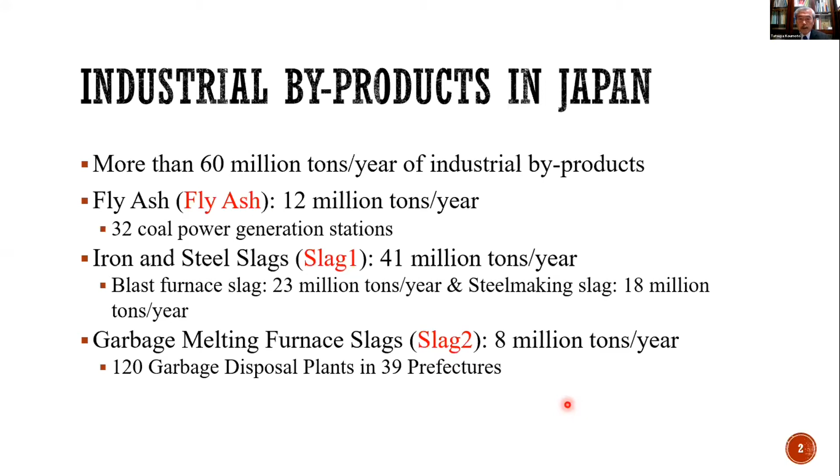And garbage melting furnace slags, that is slag 2, of 8 million tons per year from 120 garbage disposal plants in 39 prefectures. Almost all of these fly ash and slags are effectively used together with cement in the field of civil work according to the chemical and mechanical characteristics. The utilization of these fly ash and slags has led to the reduction of cement and therefore CO2, a contributor to global warming.

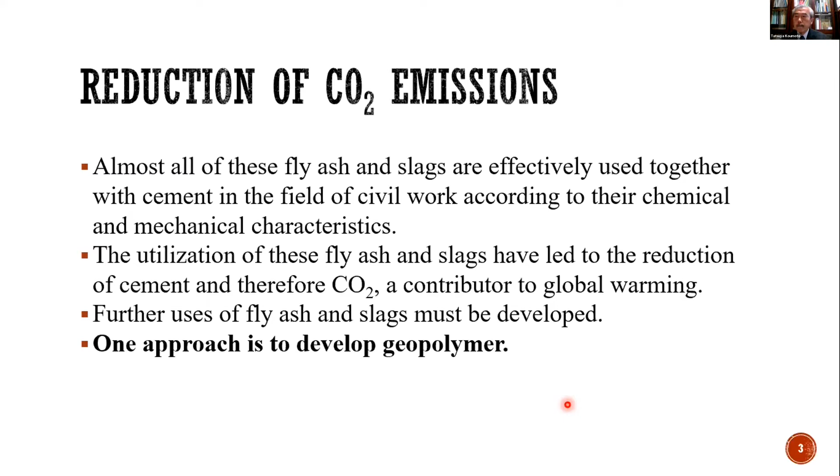Further uses of fly ash and slags must be developed. One approach is to develop geopolymer. This lecture introduces a method for production of high compressive strength geopolymers, strength diagnosis of geopolymers, and the chemical and mechanical characteristics of geopolymer by mixing fly ash and slags as binders with NaOH and sodium silicate as activators.

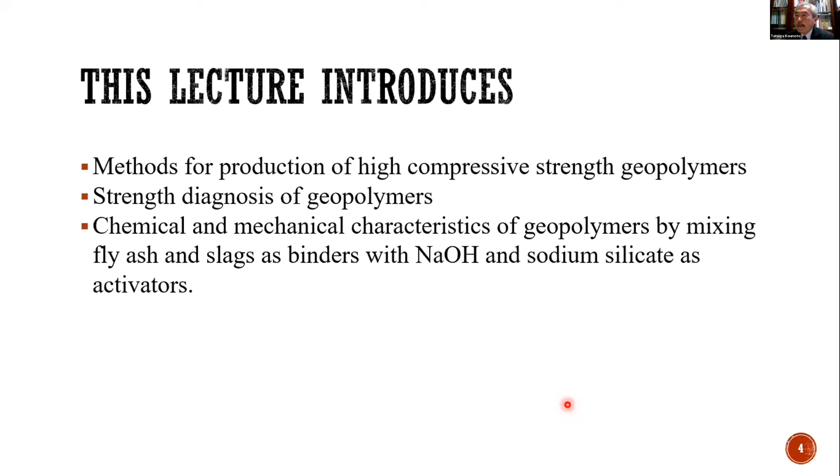Table 1 shows chemical compositions of tested geopolymer materials. I prepared in total 24 geopolymer samples, and they are classified into 9 categories of geopolymer materials. As chemical compositions, these 6 compositions are shown, and I treated these 3 compositions, SiO2, Al2O3, CaO, as the main chemical composition of geopolymer.

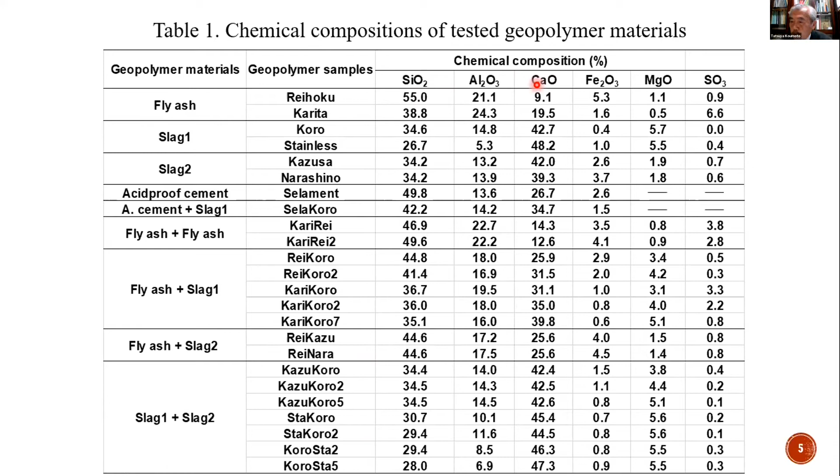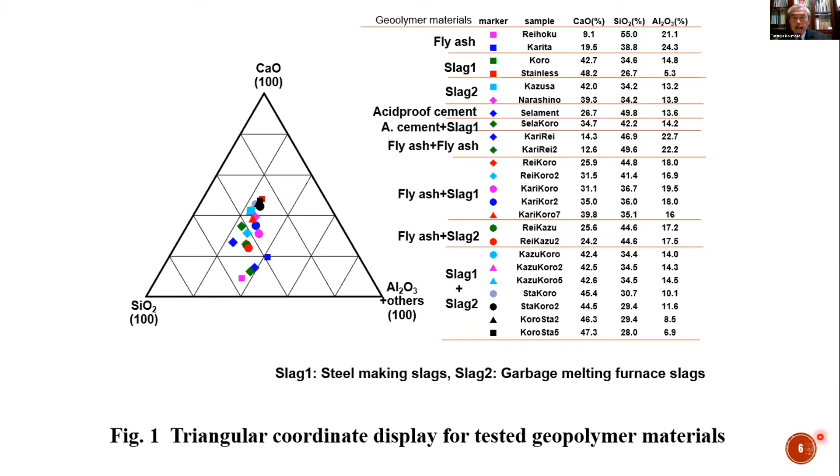Figure 1 shows a triangular coordinate display for tested geopolymer materials. The triangle is drawn for CaO, SiO2, and Al2O3 plus others. This display method helps us to understand the chemical composition of binders visually. For production of geopolymers, as preparation of binders, the particle size D50 was smaller than or equal to 0.106 millimeter. Refer to Koumoto's ASCE paper shown here.

For making geopolymer samples, the compressive strength Qu is considered as a function of W, which is the ratio of solution, NaOH plus sodium silicate, to solid binders by weight, and eta, which is the ratio of NaOH to sodium silicate by weight. Referring to Koumoto's paper, w equal to 0.4 is used. And here, eta was used in the range of 0 to 1.0. Remolded geopolymer samples were cured at room temperature for 28 days, then used for compression test.

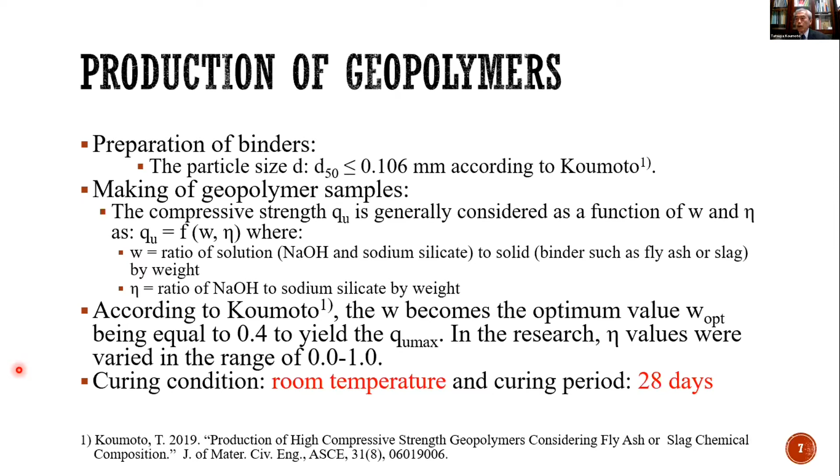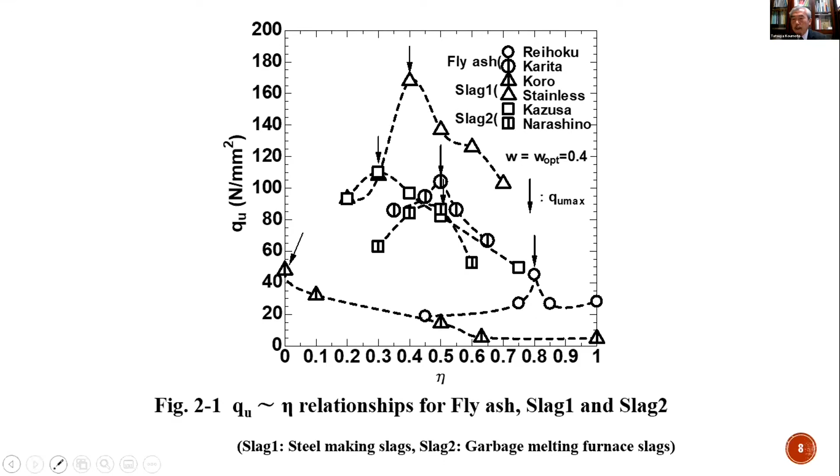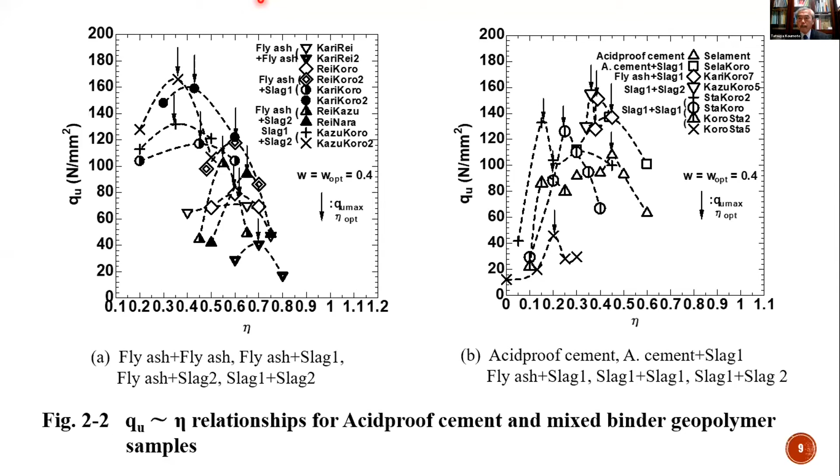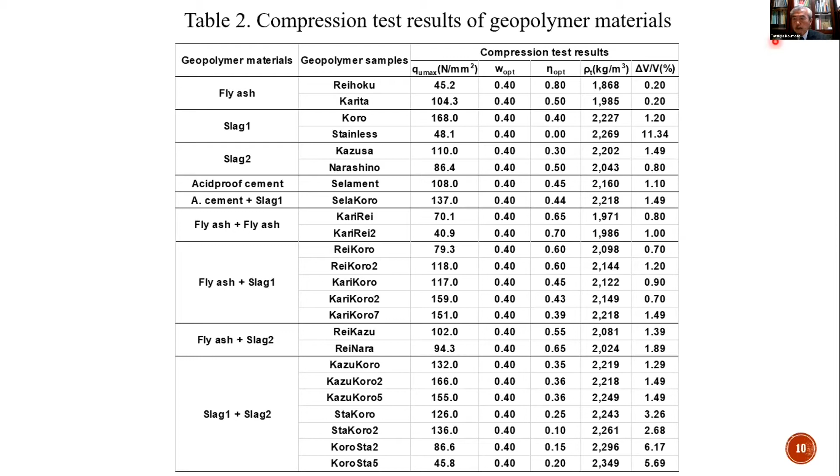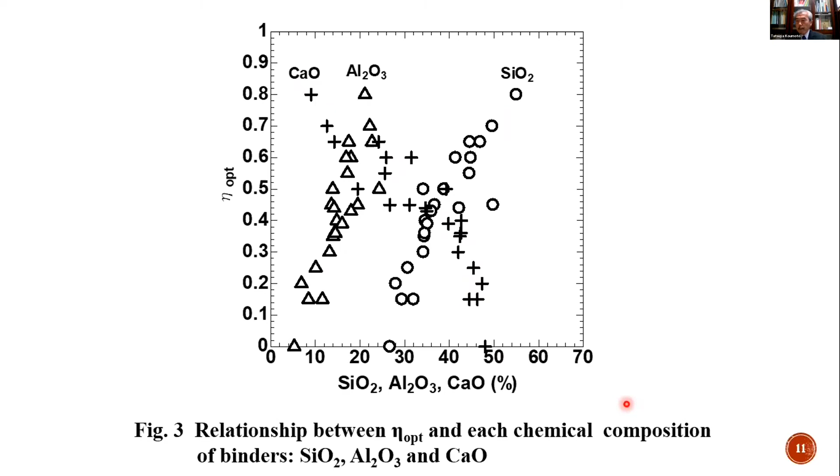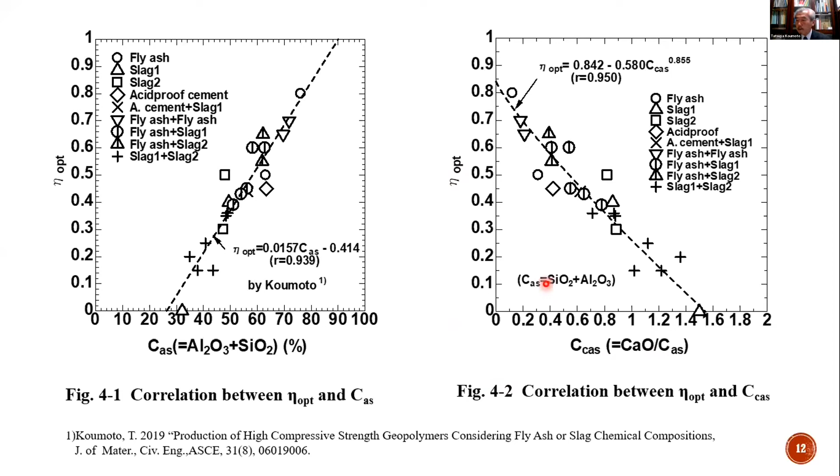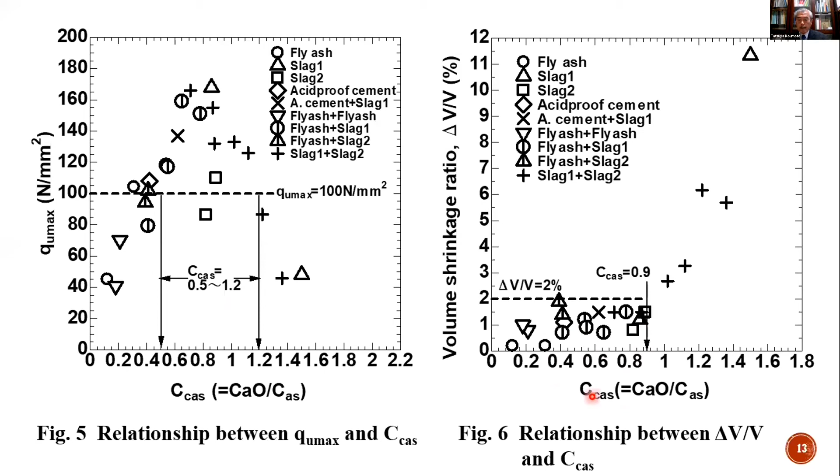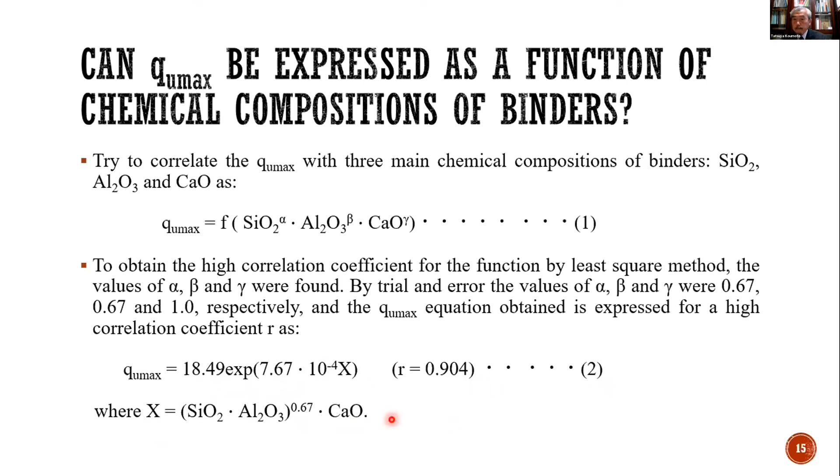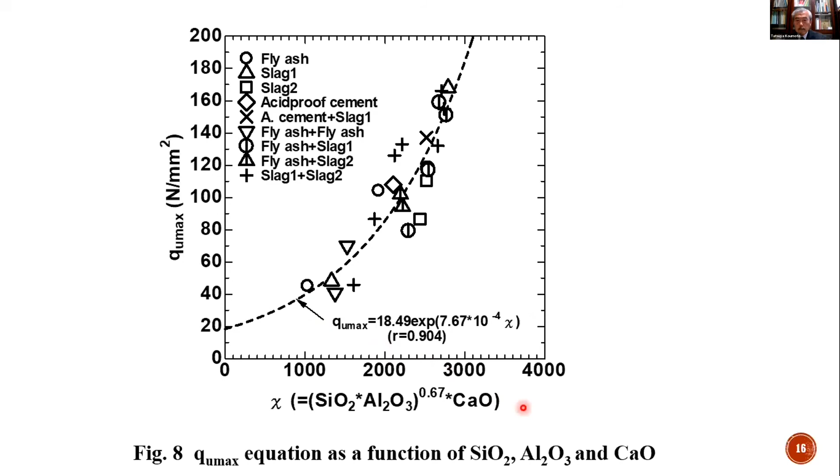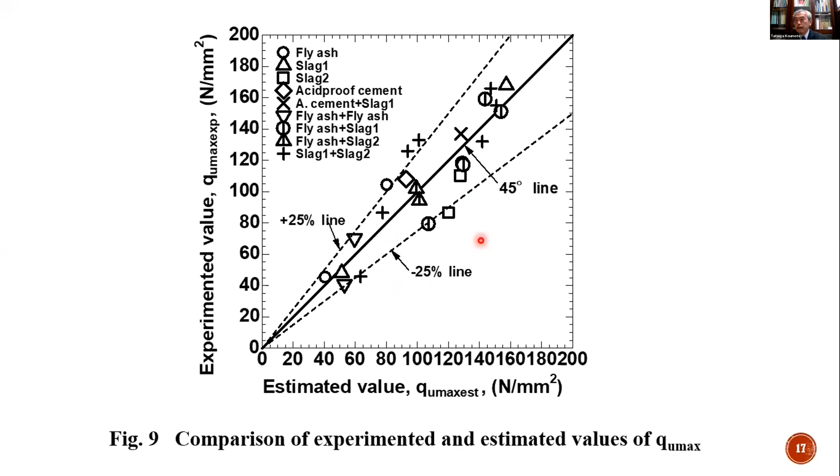The factor Ccas is effective to diagnose high compressive strength geopolymers, and binders having the factor Ccas in the range of 0.5 to 1.2 yield high compressive strength geopolymers with qumax greater than 100 Newton per square millimeter. Also, the volume shrinkage ratio, delta V over V, is generally less than 2% when Ccas is smaller than 0.9. Qmax can be estimated by using three main chemical compositions of binders by the